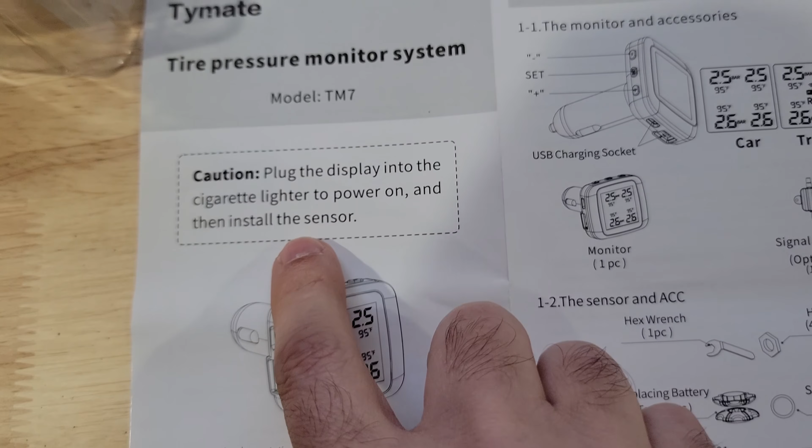And yeah, we'll be up and running pretty quickly. So taking a quick look at the instructions, it looks like they're pretty thorough, they tell you everything you need. You want to plug it in first and then install the sensors on your tires. One thing I did read really quickly in here is you want to have your tire pressure set where you want it to be right off the bat.

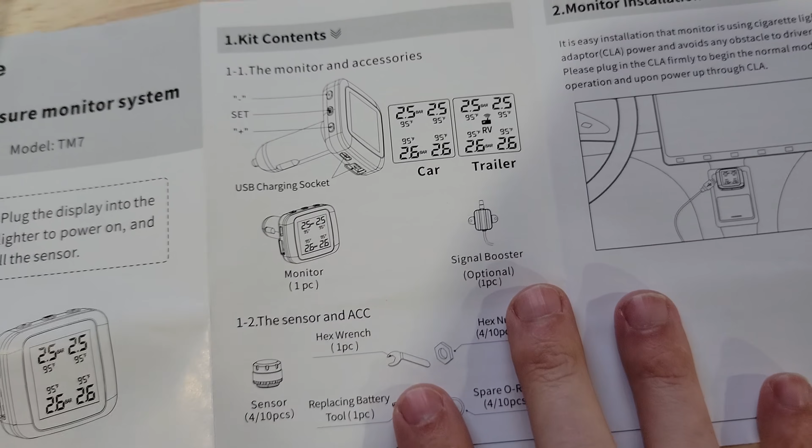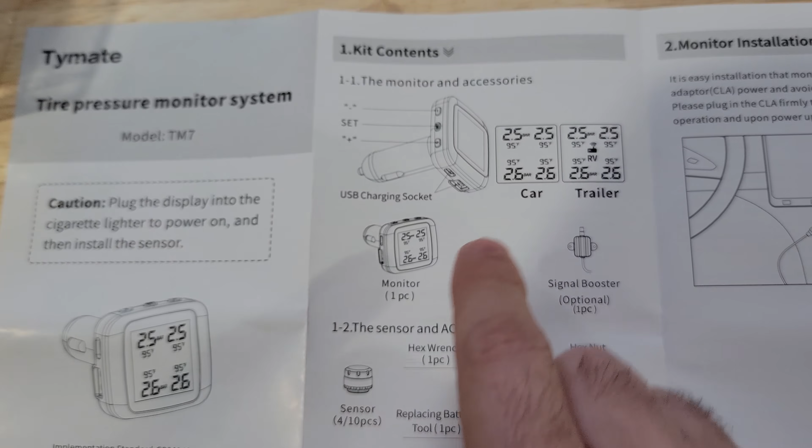Make sure you have your tires inflated to where they need to be to start with, because it looks like you don't adjust where you want the alerts to be or where the tire pressure should be, it reads it off that first install. So say in our instance, the rear tires on the Jeep are 36 PSI. You'd want to make sure you have those as close as possible to 36 to start with, and then it reads off kind of a percentage for your high pressure alert and your low pressure.

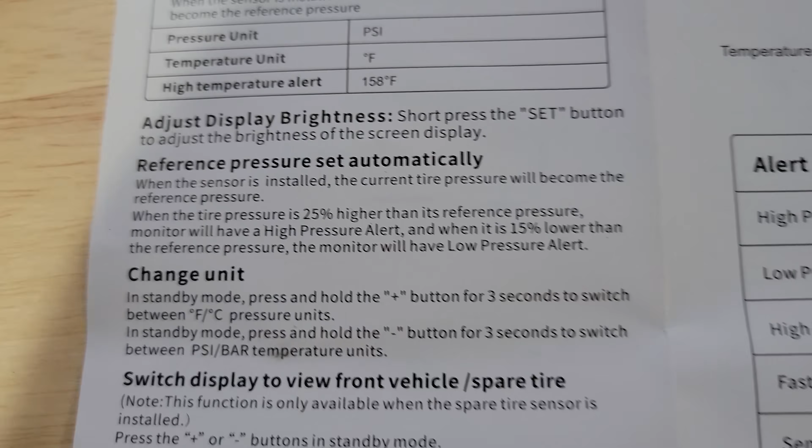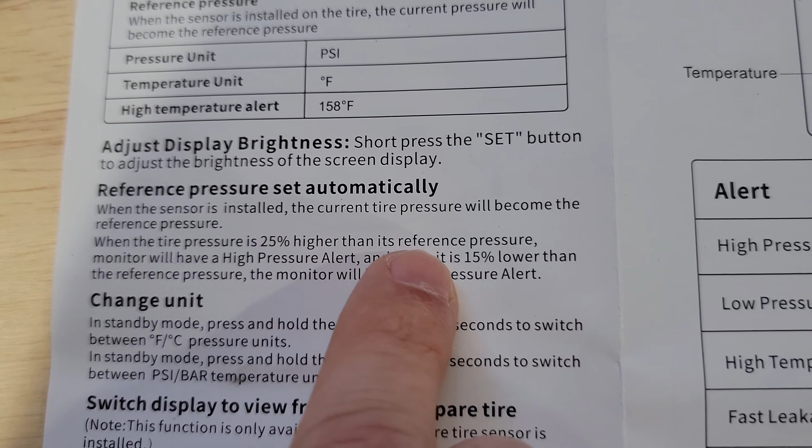We'll look in here again, I saw somewhere where it will alert. Yeah, so it's right here on the reverse side of the instructions. It will alert once your reference pressure is set automatically. It'll alert if it's 25% higher than the reference pressure, or if it's 15% lower, it'll give you an alert.

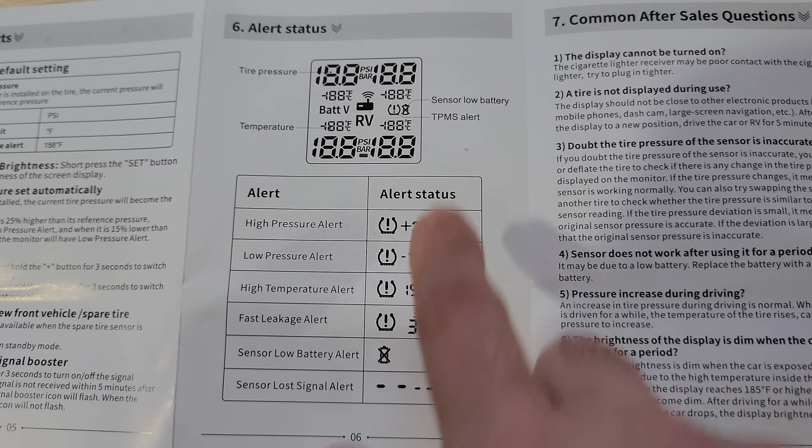And you can change all your units, adjust the display brightness. It gives you all the details about what's showing on the instrument display, and all of your frequently asked questions and things are here as well.

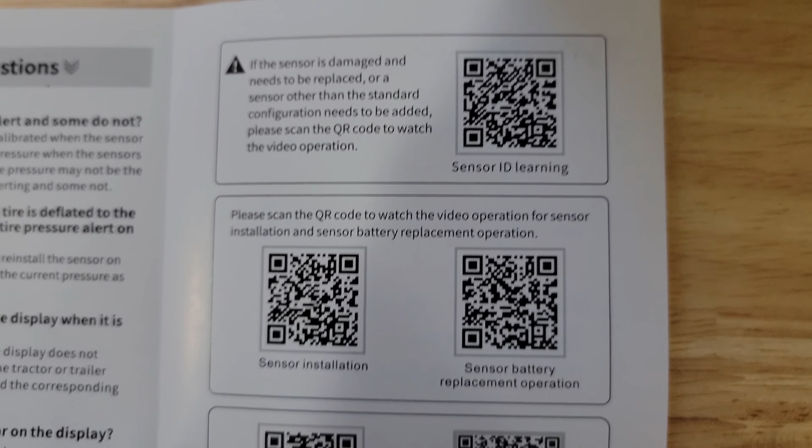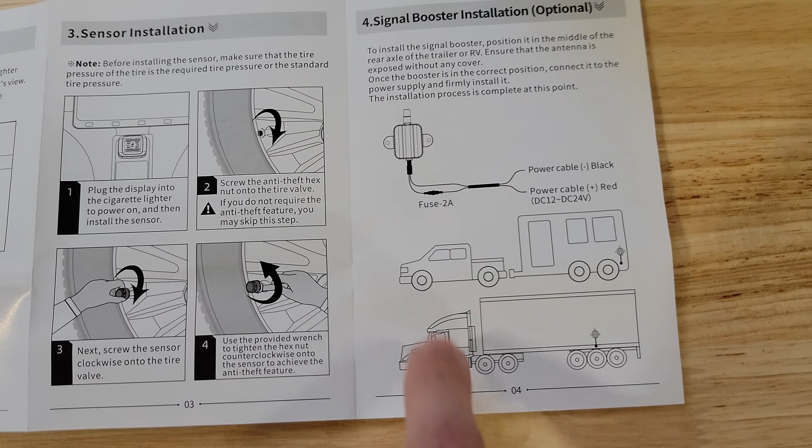You can do so there. So what's pretty neat about this, flipping back over, is they also sell a signal booster. So if you have a trailer or even a big rig, big tractor trailer, and you want to install these on the back of it, it'll boost the signal to the display unit up in the cab or near the driver and send the signal up there as well.

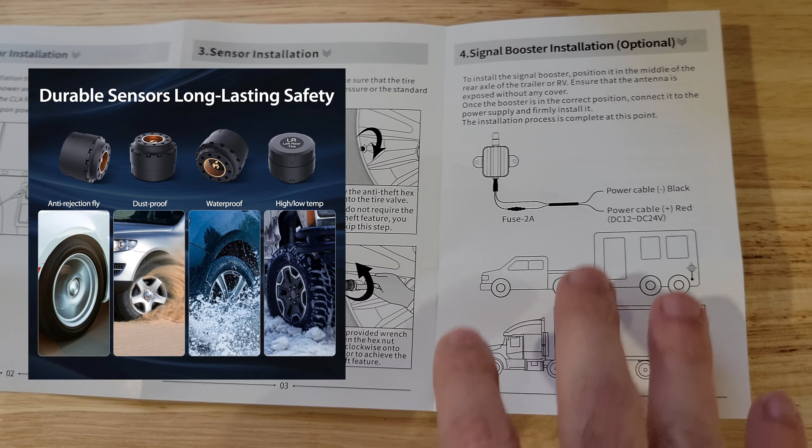Pretty cool instrument. If you wanted to put this on a boat trailer, any kind of hauling trailer, travel trailer, RV, camper, any kind of scenario, or if your car or truck didn't happen to come with this, if it's a little bit older or they just didn't include it, now you've got your option to put it on there.

But anyway, let's get it plugged in, install our sensors, and see how it works out.

Okay, so we've plugged our unit into the power outlet here, and we've got everything blinking, ready to receive a signal, so we're good to go there. Now we just got to go install the sensor onto the tire, and it should pick it up and read it right off the bat. Let's go get them installed and see what happens.

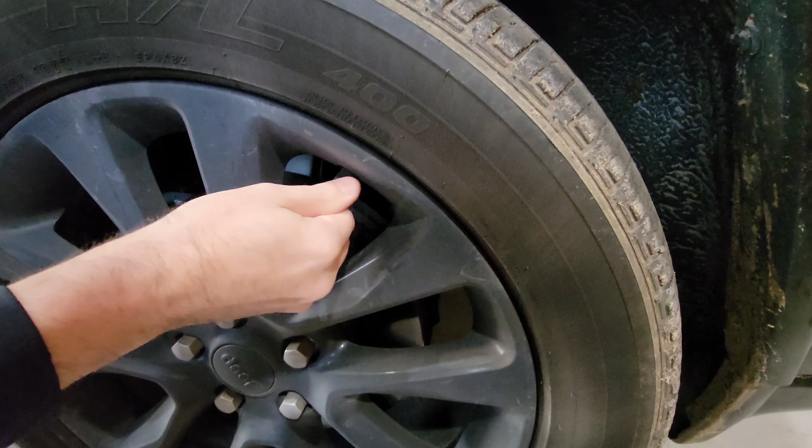All right, step one is going to be super critical now. You need to make sure you zoom in right here and pay close attention, you don't want to screw this up. You need to take this off very nice and gently like that, and there you go, that's step one.

All right, so we've got the screen in. Step one, super critical: take the valve stem cap off. Then make sure you get the right labeled sensor. We've got our right front right here, and we're not gonna do the locking cap on it right now, just for testing purposes. We're gonna just screw it right on, you can hear the air, get it nice and tight, and that should be it. Let's go check inside the car and see if it picked it up.

All right, just that easy. It's got the front one on, and it's already updated the temperature on it as well. So we've got 30 psi according to that, and 54 degrees. It's rather chilly out today, so it's picked it up just fine.

So let's go ahead and do the other three and make sure everything's working fine, and we'll do some testing. And there we are, we've got all four picking up, reading pretty much the same. That front left temperature is a little bit lower, but the other three are spot on.

And the front tires are supposed to be lower in this Jeep, I don't know what your PSI might be. Oh, there's the temperature updated, now we're all in sync, everything's matching perfect. So you saw just how quick and easy you can get up and running with that install, and it's already picking everything up.

So we'll go drive it around and do some testing. All right, so we took a quick trip around the block, and the tire pressure sensors on the car itself updated: 32's in the front, 37, 38 in the back, so pretty much uniform right where they're supposed to be. So let's take a look at the Tymate sensor.

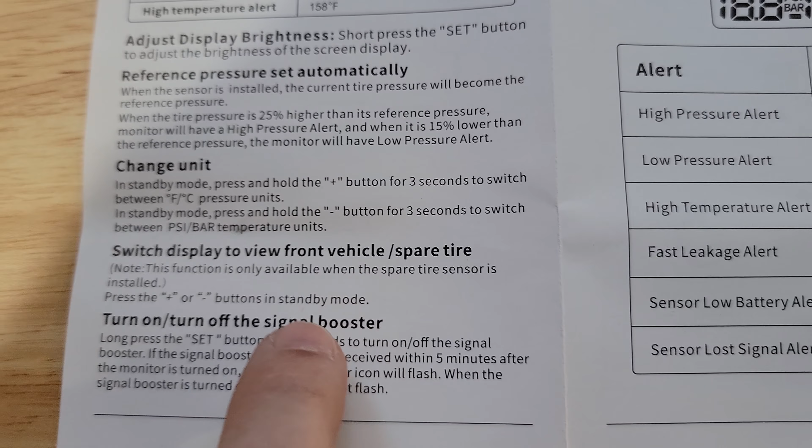It's working perfectly. If we take another quick look at the instructions, we swap back over, it tells you all your settings here, your PSI, your temperature, your high temperature alert and everything, how to adjust the brightness, your reference pressure, change units, all that different stuff if you do want to go with the signal booster, and all of your readouts and everything's right here in the instructions.

So it really is a pretty well thought out kit. It's short and sweet, straight to the point. It's not a whole lot of frills and fancies because it just does what it's supposed to do.

So if your vehicle didn't come with one of these pre-installed from the factory, it'll be super easy to add this, and you can monitor your tire pressures if you need to, especially with the cold weather we've been dealing with here lately. We've had snow, ice, freezing rain, all kinds of stuff. It's been freezing cold temperatures here. So I finally got a chance to get out here and install this and test it out.

So if you're like us, when it gets real cold, your tire pressures are always dropping. And so if you need an alert or you need to monitor it and your car doesn't have that capability, now you got an easy way to add it and install it in a matter of minutes.

Also, I think this would be excellent for RVs, boat trailers, any kind of other trailers, campers and stuff like that, tow vehicles and whatnot. If you want to monitor those tire pressures behind you, you can do it with this. Might have to add that optional signal booster, but might not. Test it out first and then you'd be good to go.

But yeah, short and sweet and to the point, worked perfect.